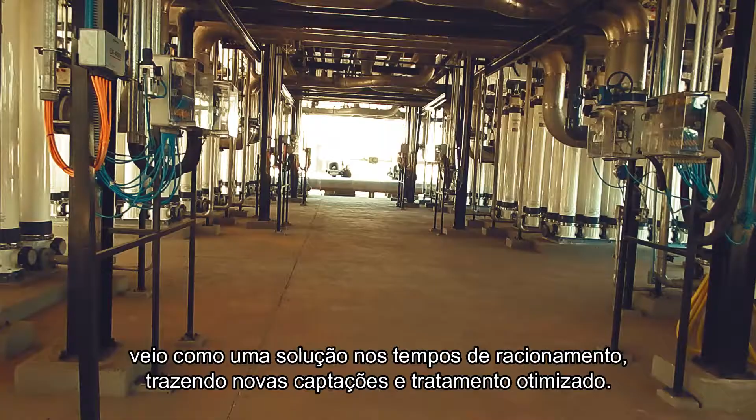The Gama's water treatment station is one of the recent projects of the DF's Basic Sanitation Company. It's an ultrafiltration station. In the post-project phase, the station goes through adjustments and tests. It came as a solution in times of rationing, bringing new abstractions and optimized treatment. It has a reduced space compared to other treatment stations and produces with the same capacity in relation to what is captured and treated.

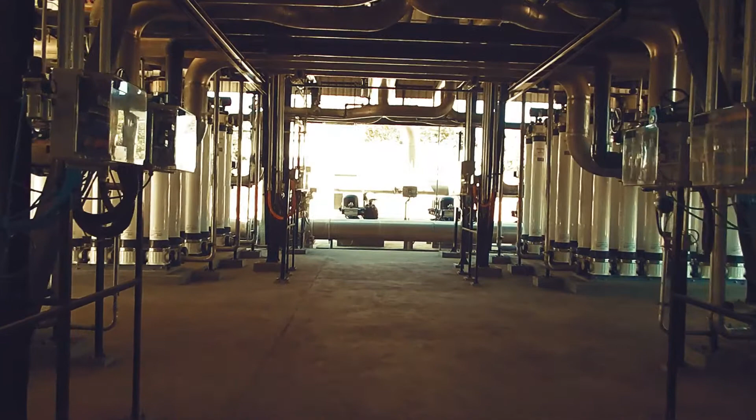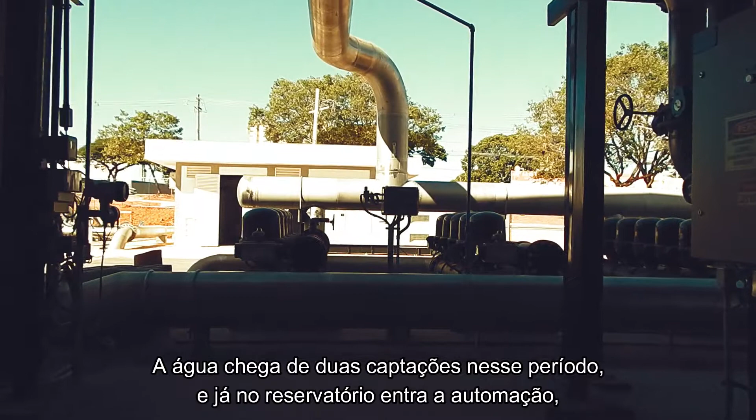The water arrives from two abstractions in this period, and in the reservoir comes the automation. There is a water level control carried out by sensors, which informs the operation of what the equipment should perform, with low or high load, for example.

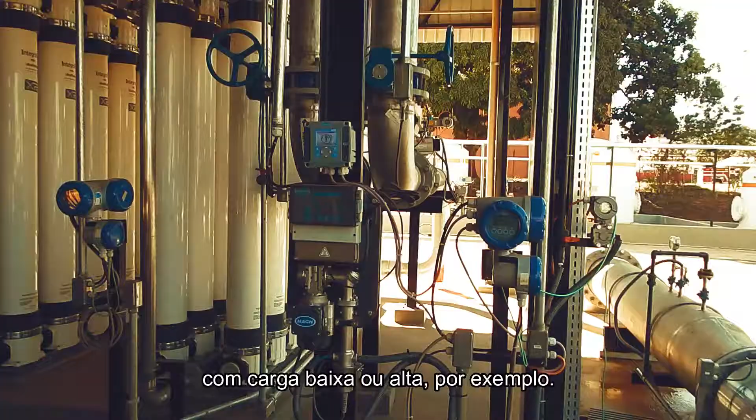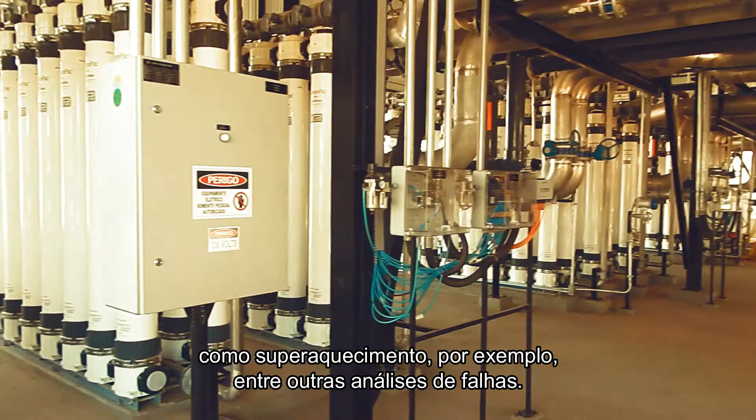The water is pumped, goes through pre-filtering, and goes to the ultrafiltration modules, where there are pressure analyzers. The system points out unwanted reactions that must be observed, such as overheating, for example, among other possible failure analyses.

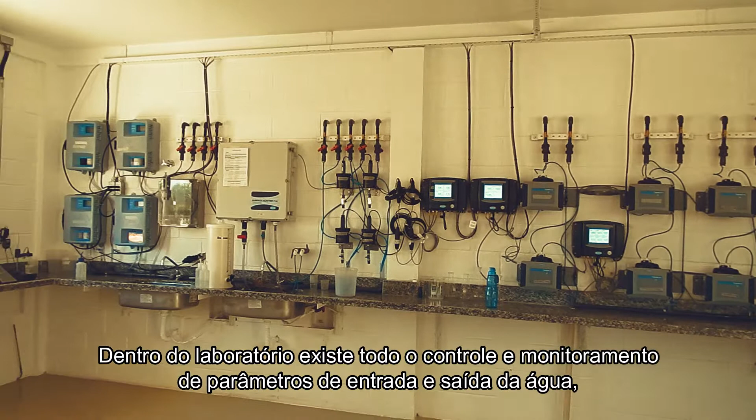It can be observed that the station has a layout for processes sectorized by functions. Inside the laboratory is where all the control and monitoring of the water inlet and outlet parameters take place, as operators perform manual tests for constant comparison. The water then goes to the reservoir and then to distribution.

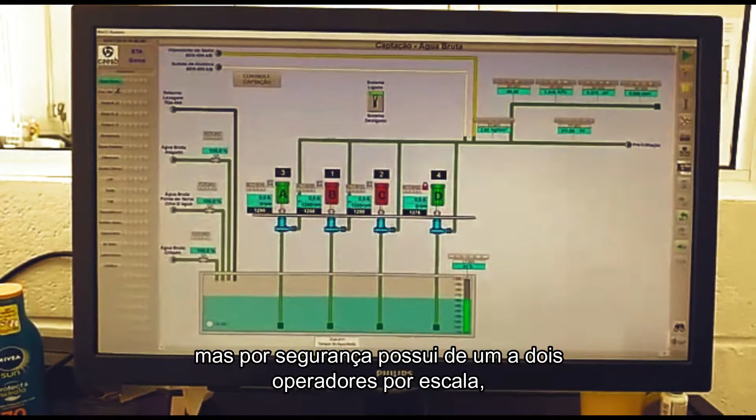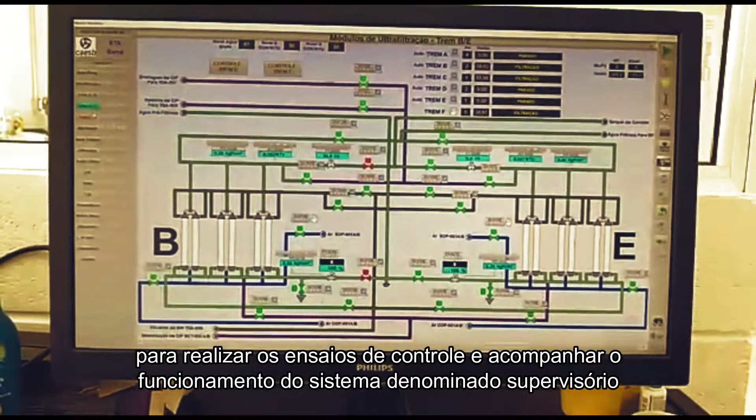The ETA GAMA is not totally autonomous, by choice, because although it has a control system that can be monitored remotely, for safety it has 1 to 2 operators per shift. For occasions that require fast performance, there's a system called supervisory for controlling the tests and monitoring system functions. Operators must be aware of possible alarms, since monitoring is performed in real time. The system should be constantly checked and discussed with those in the field to maintain operational competence.

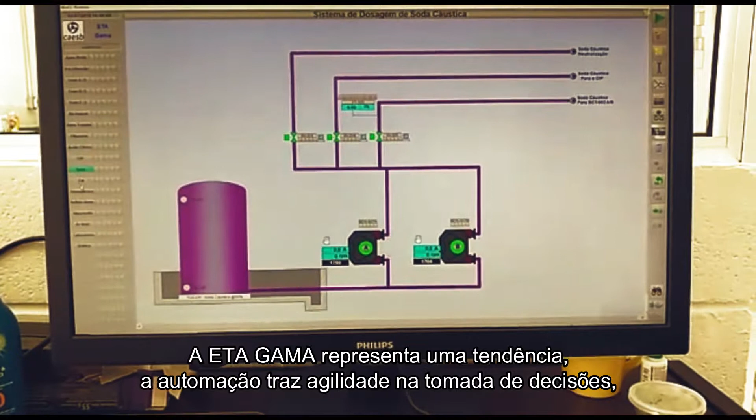The ETA GAMA represents a trend. Automation brings agility in decision making, fast and responsible failure detection, and easier control of the equipment, and it's the second of its kind for the DF. Automation will be more and more present everywhere.